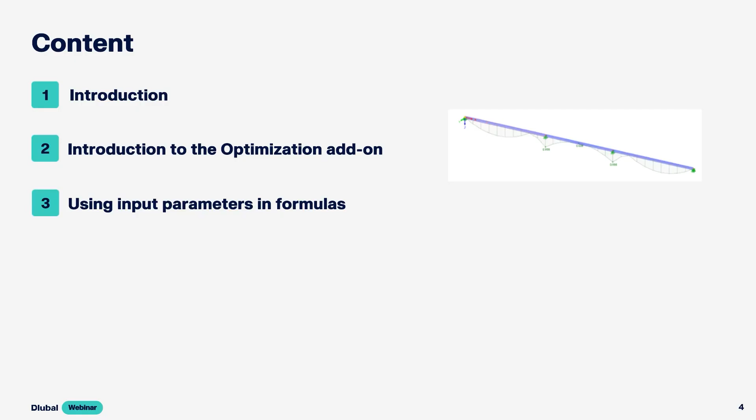Thank you, Andreas, and welcome to today's webinar. Today we want to deal with the optimization add-on, and first of all I want to show you how to activate the add-on and give you a small introduction, and after that I'm going to show you how you can use this add-on to optimize global parameters and how to use parameters in formulas and optimize them. So we are going in.

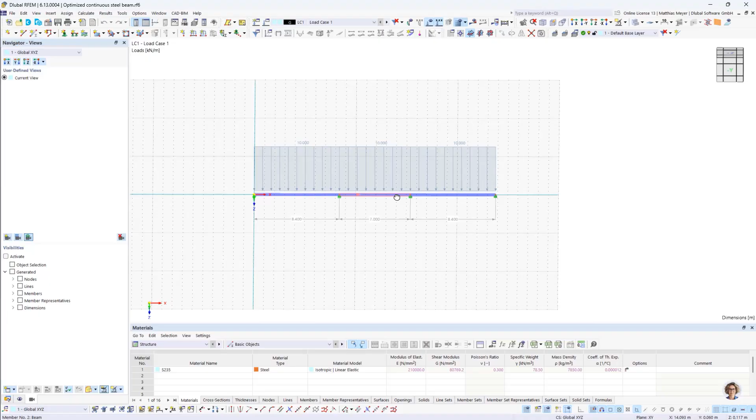First thing I want to do is optimize a continuous steel beam. It's going to look like this. We have two outer fields which have the same length and an inner field, and the length of the outer fields differs from the center field. So we have a symmetric system. And what we also have is a continuous constant load of 10 kilonewtons per meter.

We also want the self-weight activated, and we ask ourselves, okay, how long can this beam be at its maximum, which length it can span. The material is given, and also the cross-section is given. It's an IPE 240 and we have S235 steel. All right.

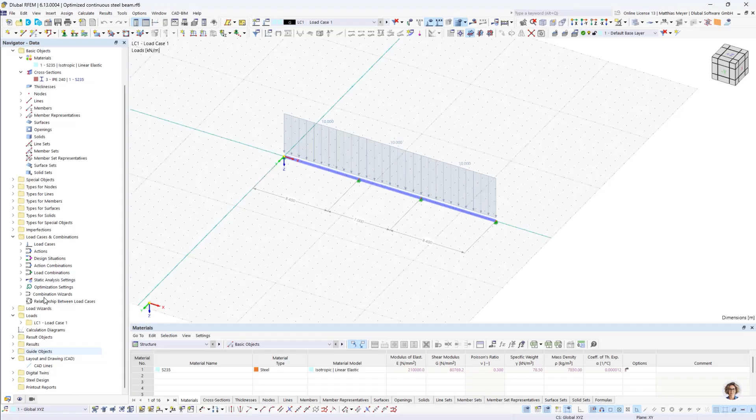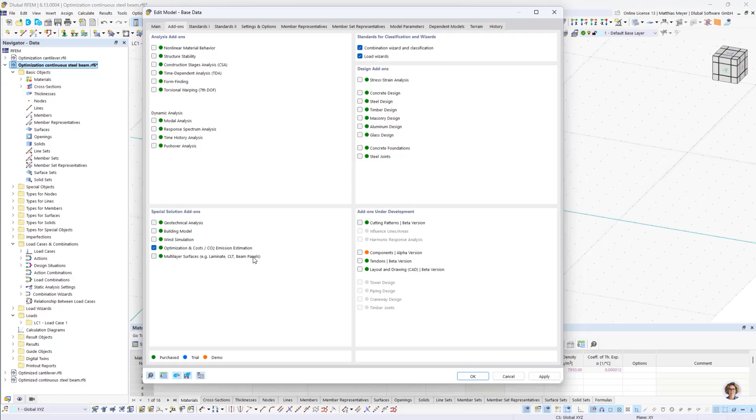So first of all, we have to activate our add-on. We're going to do this at the base data interface. So until recently, the add-on was here on the right side. Now it's on the left side. We activate this checkbox. We also want to activate steel design. And we're going to choose the recommendations of the CEN. And click OK. And the first thing we have to do is define our nodes.

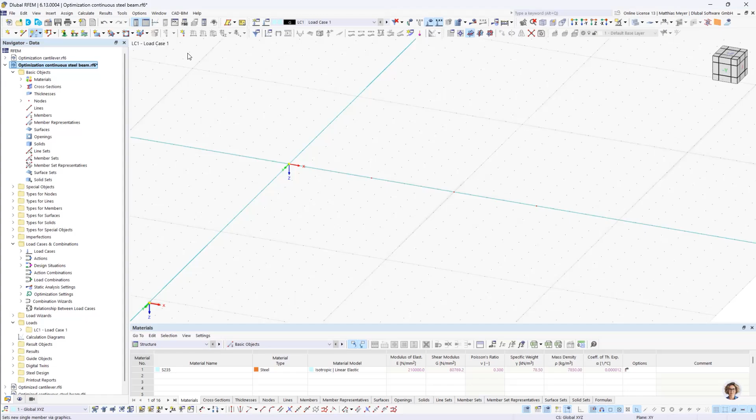The first node will be at 0, 0, 0. The second node is at 5, 0, 0. We don't know what the maximal span length is. This is just a guess, and for start I'm guessing it's 5 meters. And so the next one is at 10 and the last one at 15. All right, then we have to put our beams between the nodes like this.

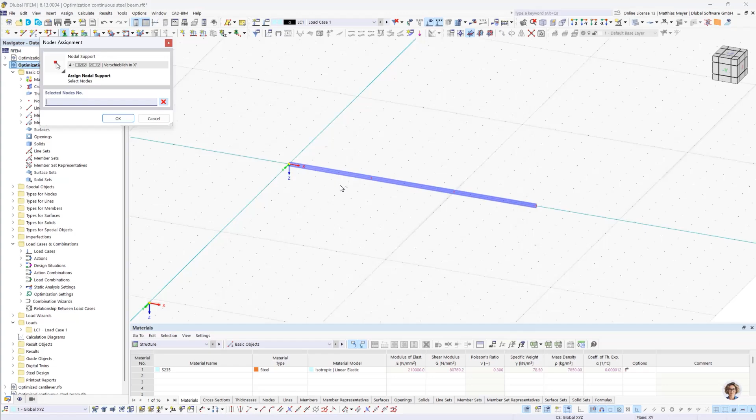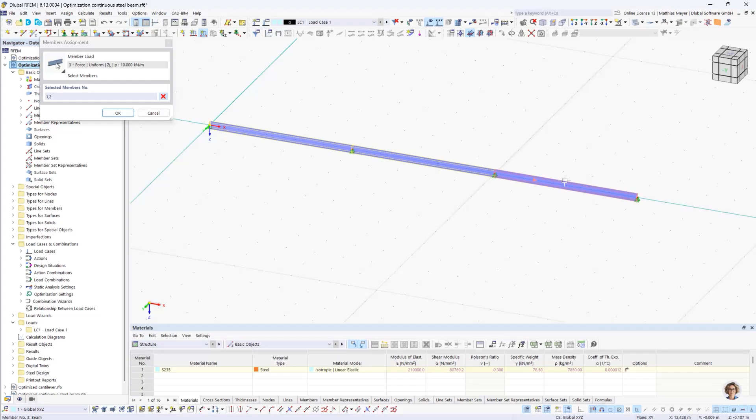Then we have to add some supports. The first node will be fixed in X direction. Okay. And the other nodes are not fixed in X direction. Okay. Small check if everything is all right. It is. And then we apply some beam load. Oh, this was the wrong interface. We need this one of 10 kilonewton per meter. And like I said, the self-weight is activated.

And now we don't want fixed lengths, we want them dynamic. So what we are going to do is we open the nodes table, and now we define some global parameters. I am going to delete them. Yes. All right. So where we are going to do this, we go on global parameters like this.

And then we call the length of the outer fields L outer. We can also make comments to describe our parameters. Call this length of the outer fields. And then we have a length of the inner field. And give it like the same comment.

And that's it for now. And now we have to make the coordinates of the nodes dynamic. So the first one is still fixed, but the second node should be dependent on the length of the outer fields. So we give it this parameter.

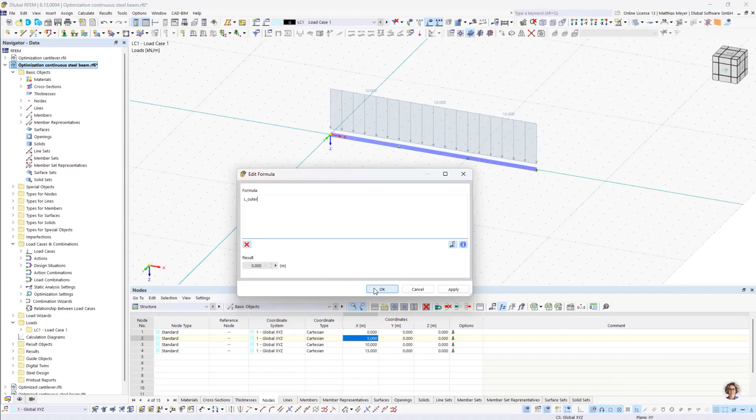We can also switch between parameter view and absolute view. And here the x coordinate of the second node has to be 1 time the outer length plus the inner length. Okay. And the third node has to be here: 2 times the outer length plus 1 time inner length.

Here, double click. All right. So now it's all on 0. Why? Because we have to define some values in here. Like I said, we can start with 5, but we actually want to optimize this parameter. So what we are going to do is we need a third formula for the whole length. So I call this L whole.

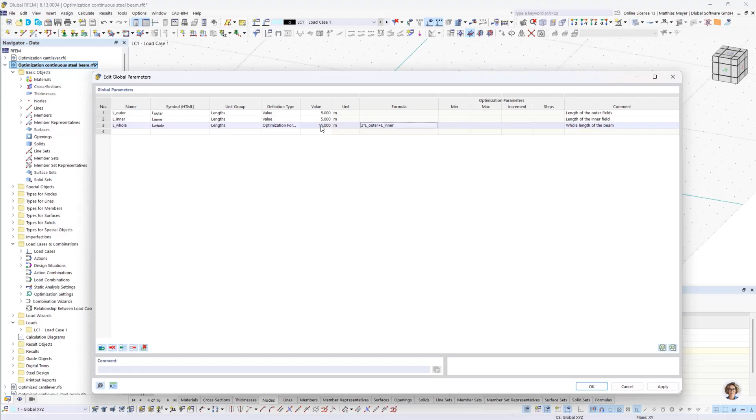And we define this as an optimization formula. So we define a formula, and the result of the formula we want to optimize. Yes. So the whole length is 2 times the outer length plus the inner length. And right now it's 15 meters. And then we press OK. So our beam is back.

And now we open our optimization interface here at Calculate, Optimization Settings. And we want to maximize our whole length. So we choose max global parameter. This is also new, also min global parameter. So these options are for minimizing or maximizing global parameters.

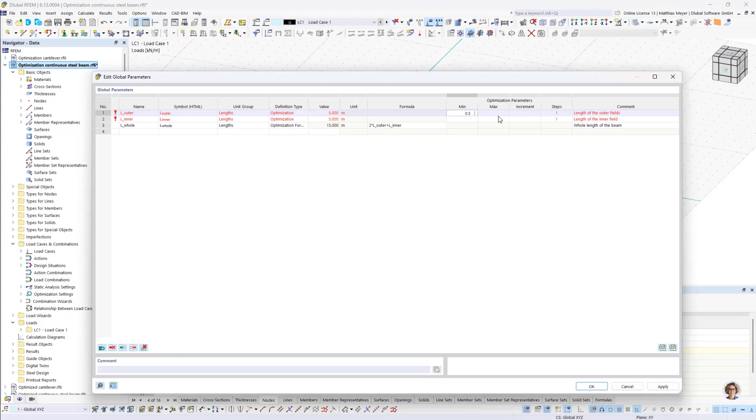Here we still have a problem because the parameters we need to change to optimize the whole length are not shown here. Why? Because we need to define them as optimization parameters. And for this, we also have to define a minimum and maximum value of this parameter. I'm going to start with 0.5 and put it up to 10. So here you can also define the range of our parameter. If you say it shouldn't be longer than 10 or 11 or whatever, you can define this here.

And we also need to define how many steps per optimization we want to consider. I'm going to choose 20 for this example. Press OK, and now if we go back in our optimization settings, we can see our parameters here. Right now we have 441 mutations, which is 21 times 21.

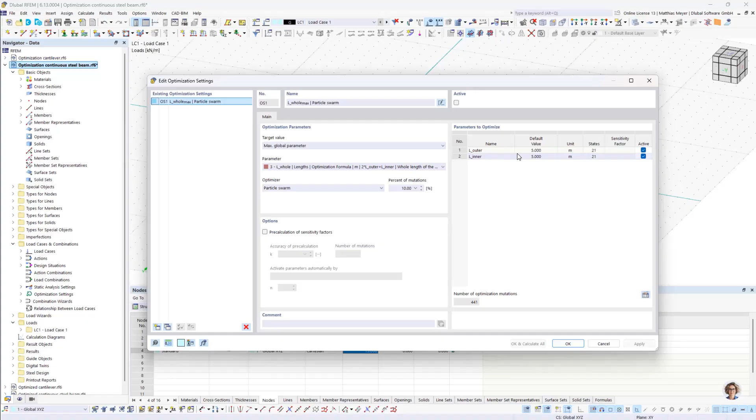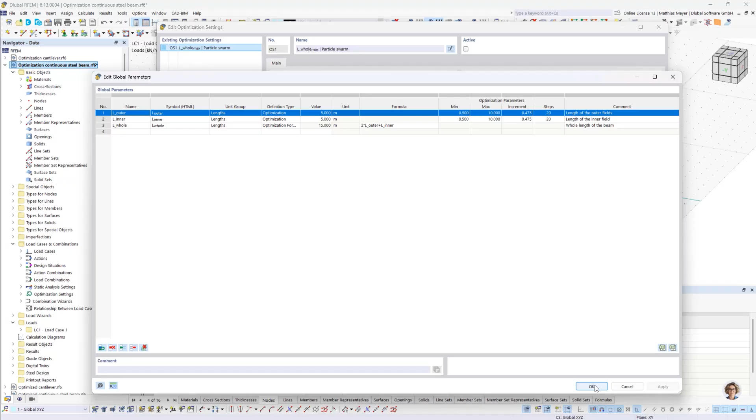So what the program is going to do is it will start with 0.5 for both of them, and then start increasing one of the values. And when it has done this 20 times, it will increase the second value for one step, and then use all the 20 other steps and so on. So this is the most simple optimization procedure you can use. There are other possibilities, but for simplicity reasons, we want to stay with this optimizer right now.

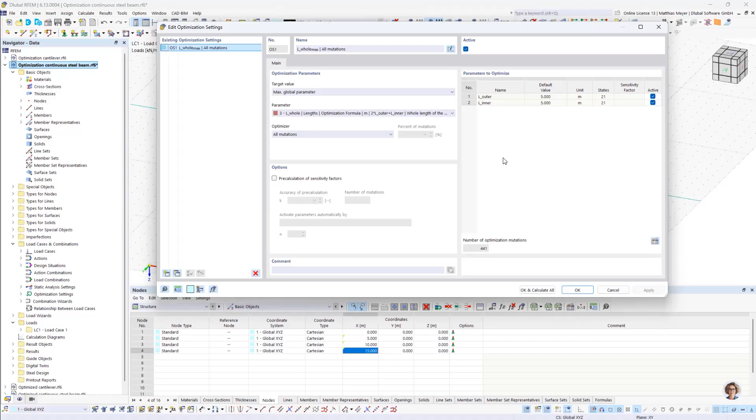All right. Now we press OK. What we have to do first, which I forgot, is to press on activate. And when we have set this checkbox, we can also calculate this. Why is this checkbox here? It's so that you don't accidentally start optimization, because it will need a long time. What I also want to do is only check the ultimate limit state. So first we go to steel design and deactivate the other states like this.

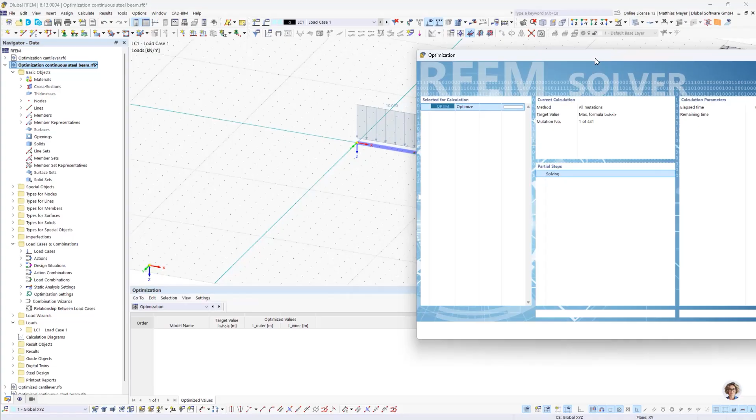And now I'm going to start the optimization process. And you can see that it actually needs some time per step. At one point I will cancel it, but I just want to show you how the calculation procedure is done. Like I said, it starts with 0.5, 0.5. It will always adjust the model. And now it's increasing one parameter step by step. But 441 optimization procedures will take a lot of time, so I'm going to cancel this right now.

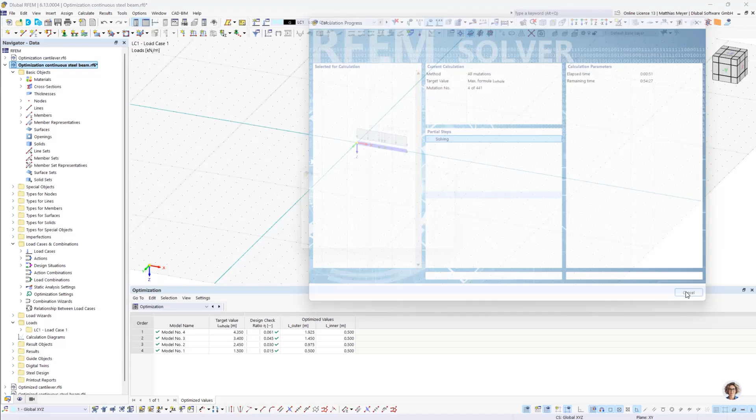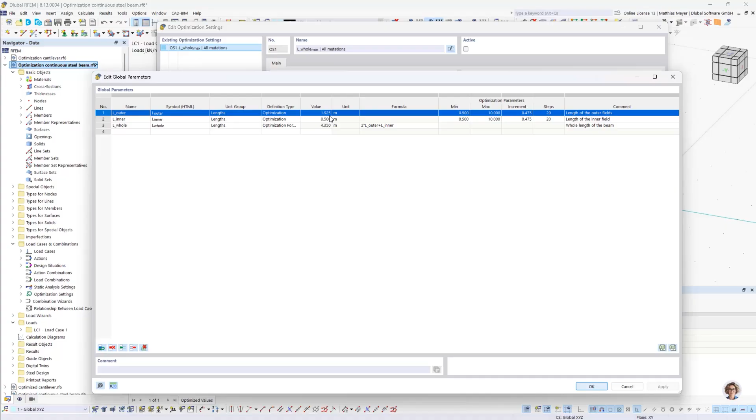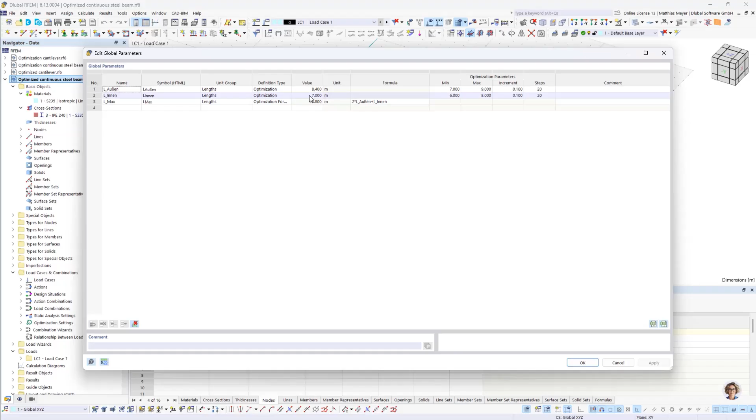Okay, and if you cancel the optimization procedure, it will take the last optimum it could find and will set all our parameters to this last optimum. So it's set on 1.925 and 0.5, and uses this also for our model. Here I have the whole system optimized. You can see that our parameters are set to these optimization values, and I'm going to show you.

Going to steel design. Here you can see the utilization is almost at 1.0. We could use more steps and then we would get closer to 1.0, but for now this is fine. And for our maximum length, we can use guide objects for this using dimensions.

So in this case, the optimized length would be 23.8 meters. We can also see the biggest moment would occur here over the center supports, and also the outer fields are longer than the inner field. All right, so this was for the continuous beam.

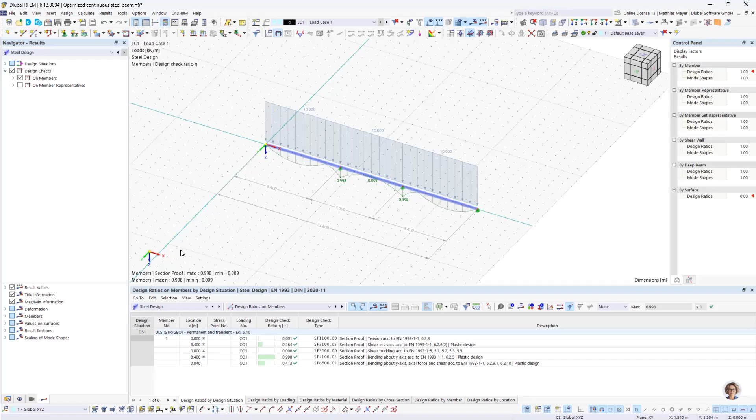And the next thing I want to show you is how we could optimize a cantilever. So we want something like this. We have a cantilever with 3 sections, and for each section we will use a different cross section.

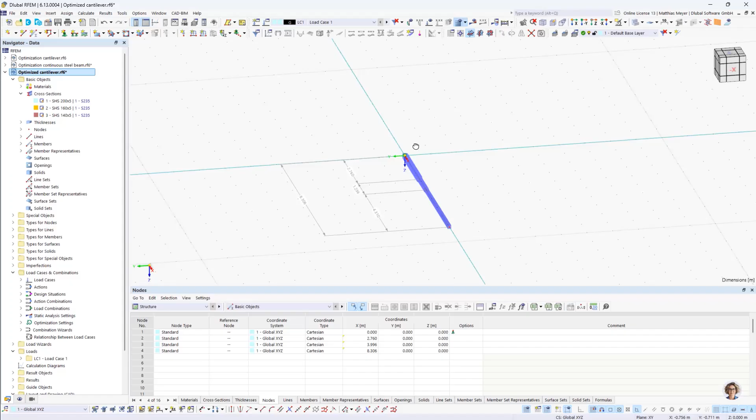Here I choose these cross sections, and you can imagine that because we have a linear increase of the moment, the biggest moment will occur here at the support. So we need the most resistance over here, and for this reason we could use a weaker cross section at the end of our beam, and so on. All right.

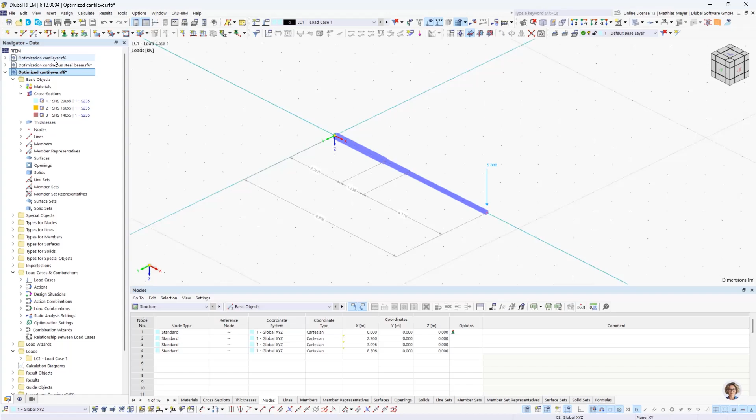So the first thing I have to do is activate our add-on again, also steel design, and I'm going to use the recommendations. All right, then I have to define my nodes, start at 0, 0, 0, and the first segment will have a length of 3 meters, next one 6 meters, 9 meters. Okay.

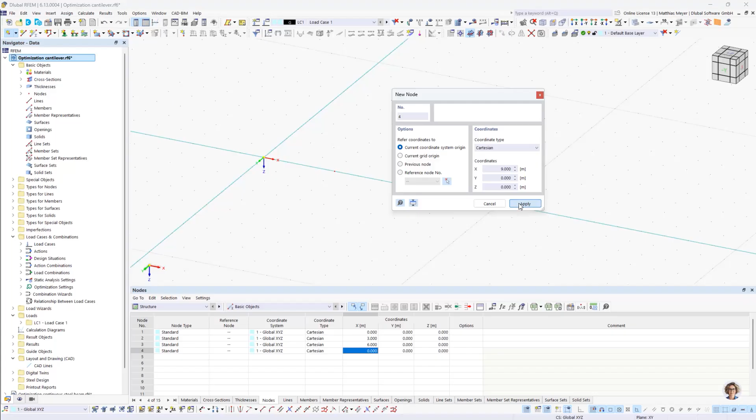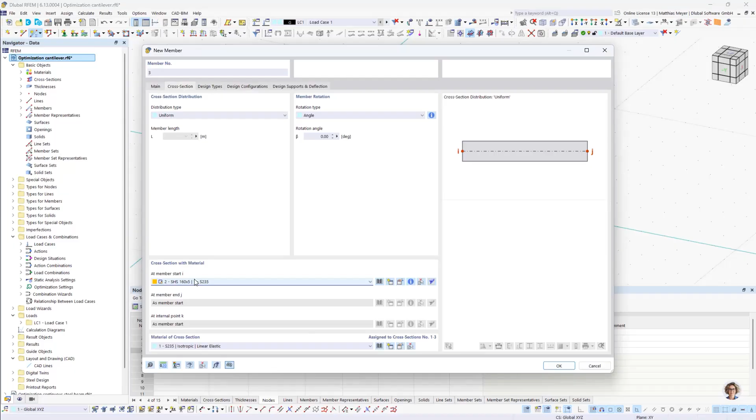Then I'm going to apply our beams. Start with the strongest cross section. Then the middle strong cross section and the weakest. Like this.

Add a nodal force, okay, 5 kilonewtons, and then I also need a fixed support at the beginning of the beam, like this. Also the self-load is activated.

And now I'm going to define my global parameters. I name them length 1, length 2, and so on. And length 1 is the length of beam 1, and so on.

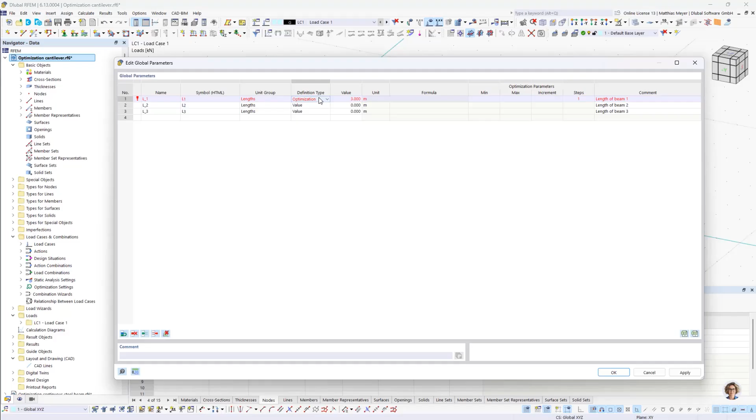Okay, I want to optimize them, so now I will change the type to optimization, and for the beginning we will stay with value, but I will change this after I applied these parameters to my nodes. So the first node is at 3 meters, which is 1 times length 1, and so on.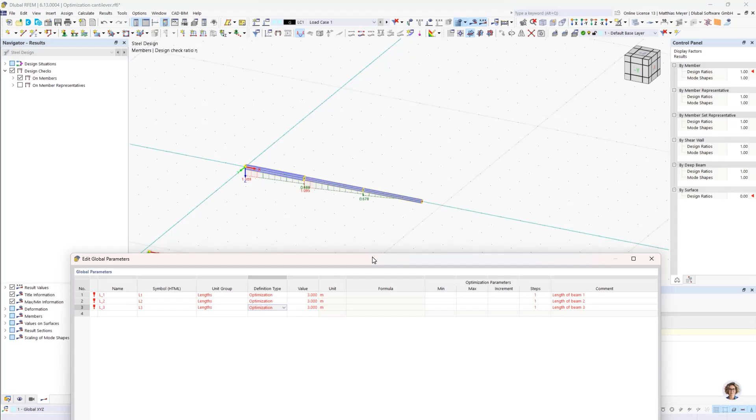We want to optimize them, so we put them on optimization, and length 3, which is the length of this segment, we are going to start with a length of 3 meters and give it a maximum of 6 meters. We'll use 5 steps. For the middle one, I'm going to start with 0.5 to 2. I kind of know the optimized length, so that's why I'm going to choose this.

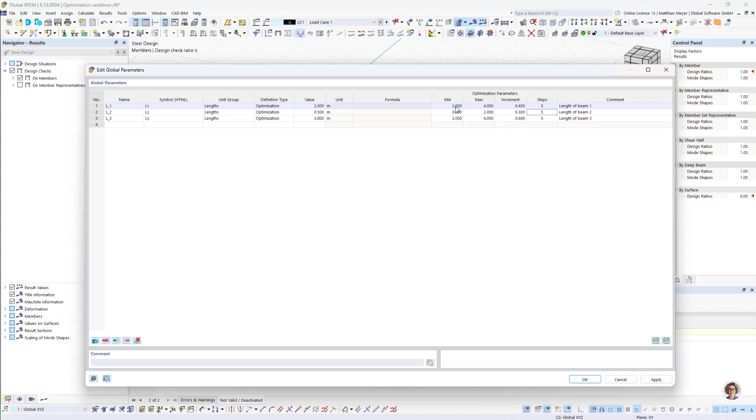And for the last one, for length 1, we start with 2, and it's between 2 and 4. Like I said, I chose these values because I kind of know what the optimized length is. Okay, then after this,

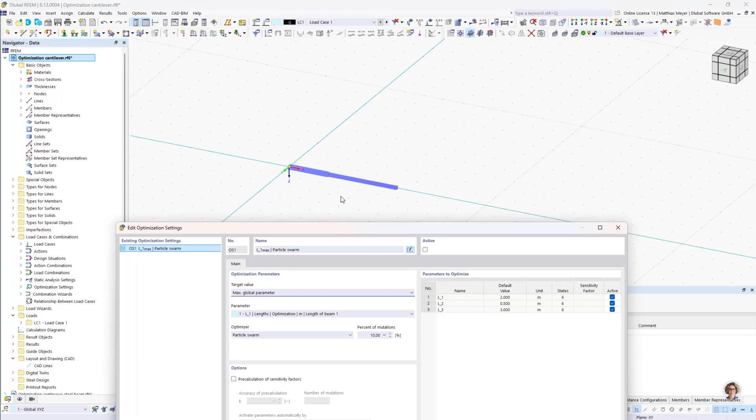we are going to open our optimization settings, and now we only want to optimize length 3, because length 3 is kind of independent of the other lengths. So we have to choose parameter length 3, deactivate the other ones, because we only want to optimize this one right now. Press on active, and then we press OK and calculate.

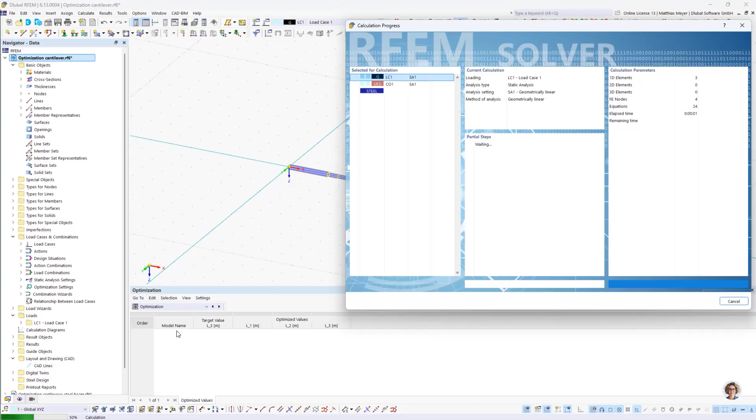So we have 6 mutations now. You can also watch our optimization process over here. And it's basically doing nothing, right? It's not doing nothing.

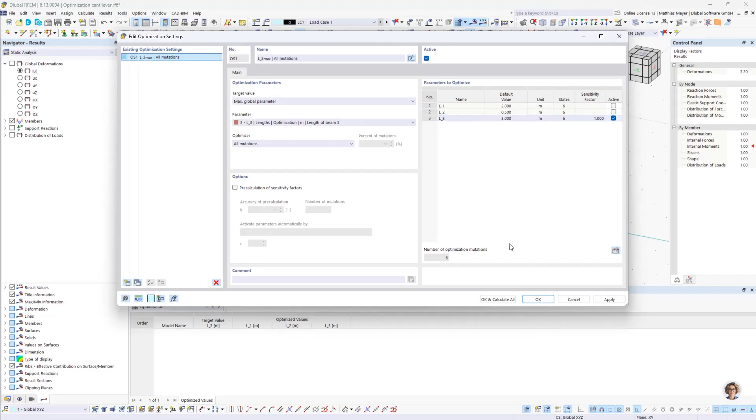Let's check this again. Length 3, between 3 and 6. We choose particle swarm, but I want to use all mutations. So we activate this again. And let's see if it's going to do some optimization now. Yes, looks good.

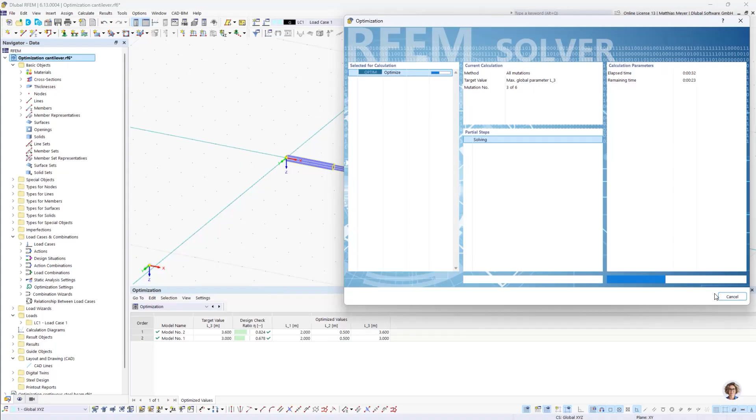So we start with 3. We have a utilization of 0.6, now 0.8. And what we can do is, as soon as we found our optimized length, we can cancel this to save some time. So probably for the next one, the design ratio would be too high? Yes, it is. So I'm going to cancel the calculation.

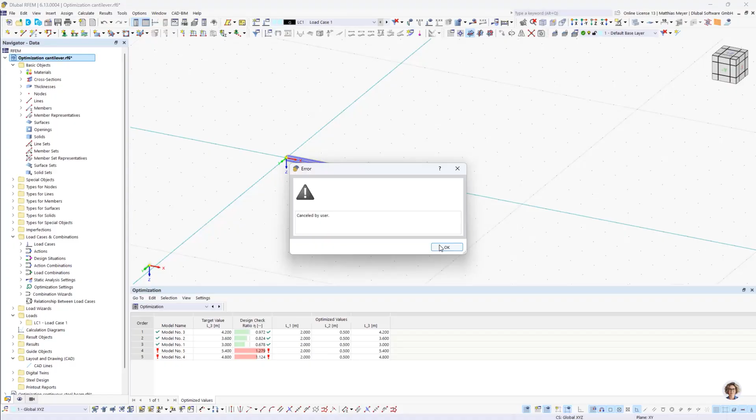All right. Now this one has a length of 4.2. You can check this by double clicking on the beam. Yes, 4.2. What I'm going to do now is go back to optimization settings, and I want to save this value. So I'm going to change this to value, so other optimization processes can't change this value. It's kind of fixed now.

The length is fixed. Okay, I press here, and then I will continue with the length of beam 2. Choose the same settings, but go to length 2, activate it, press on active, and we're doing the same again. And now it already starts with 0.972. All right.

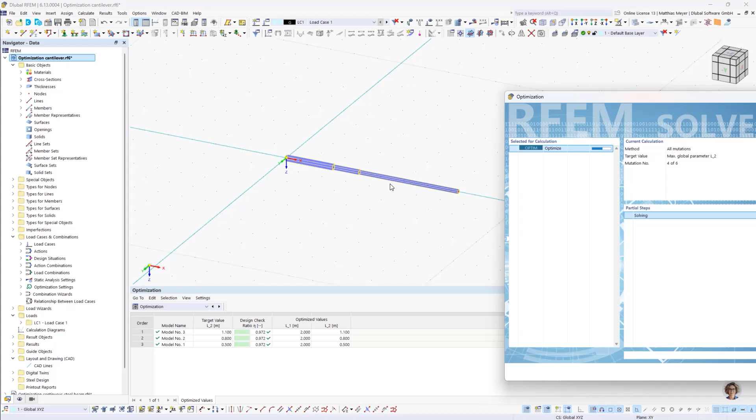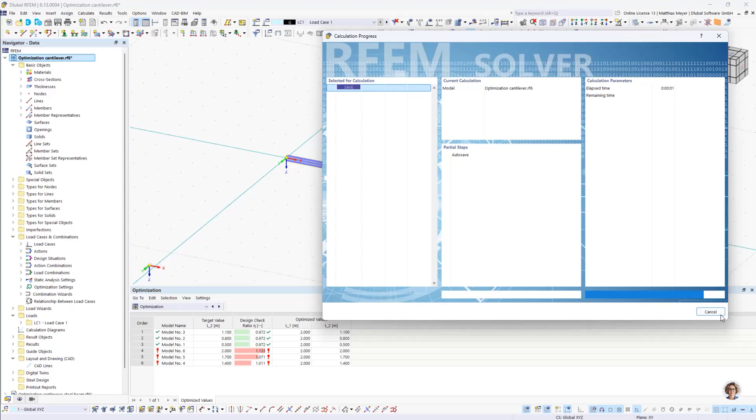Why are we still here? Because it still has the utilization of the first beam. But now with 1.7, this middle beam is too long. The utilization is more than 1. So we can cancel this. And we are stuck with our optimized value of 1.1.

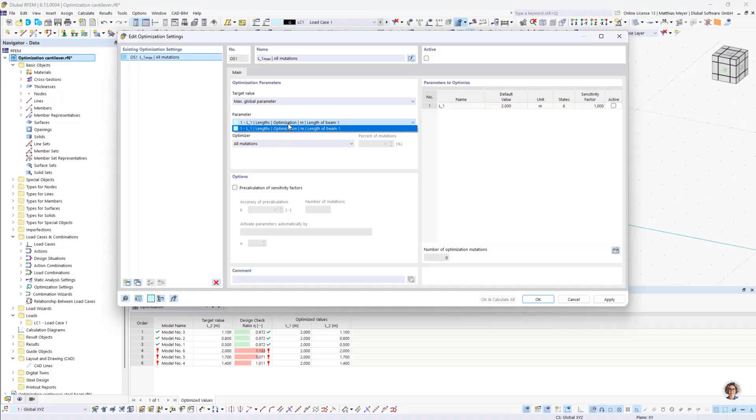We are going to change this value, the definition type to value. Okay. And we also have to go back to this because this no longer exists. What we can also do is say we only want to optimize beam 1 now. This can save us some calculation time.

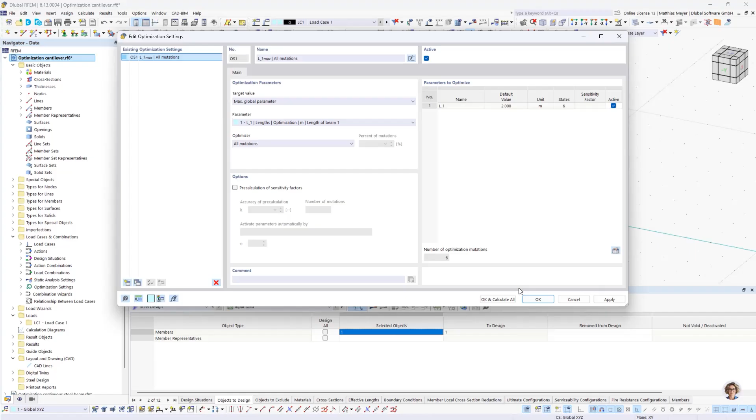Now we open the optimization settings again. We will optimize length 1. Now we have to activate, press on OK, calculate all. And now only beam 1 will be designed, which, like I said, will save us some calculation time. So we start with 2 meters, and then it will be increased to 2.4. Maybe it will do one more.

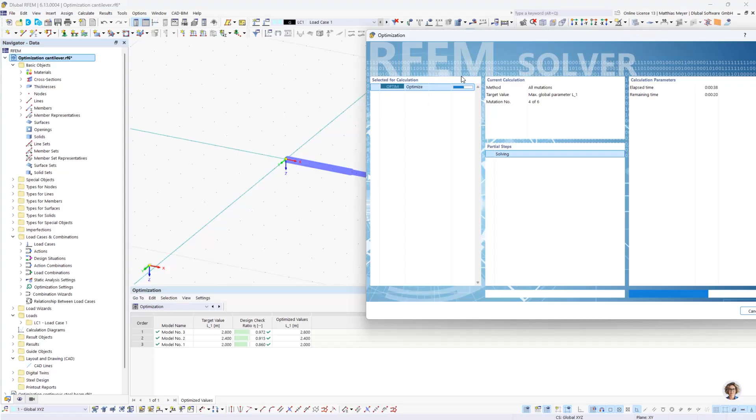Yes, and probably the next one will lead to a failure. All right, so we cancel. Yes. Okay. Now we have our optimized cantilever. We can add some dimensions. All right. And here we have a length of 8.1.

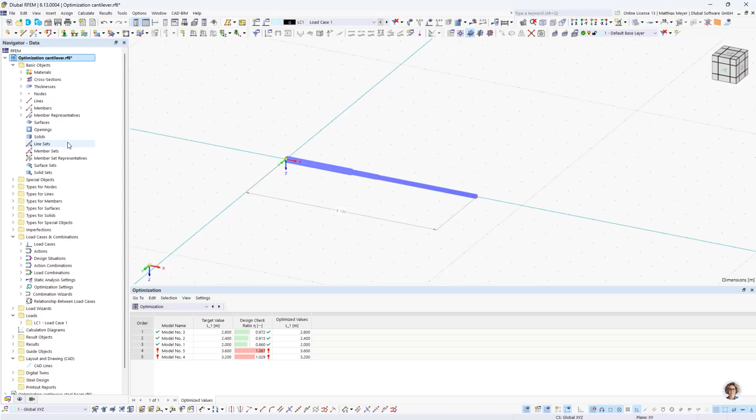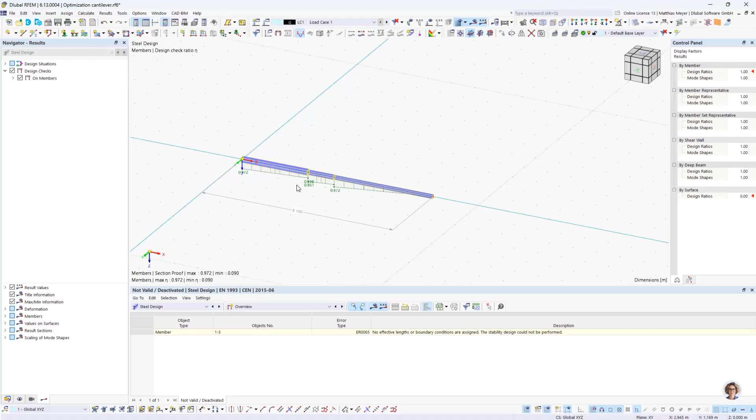Now I only used 6 steps, which is actually not that much. If we have a look in our steel design calculations and look at the utilization of all beams, we'll see that there's still room for longer beams. But in this example, I used 100 steps. And we can see the utilization is more or less 1.0, and we have a length of 8.3.